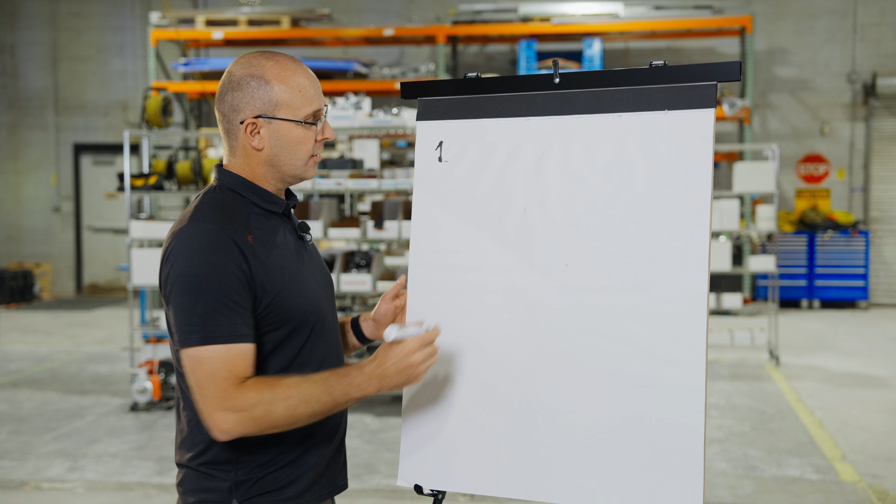You're obviously going to want to cover any safety topics because safety is our number 1 value and priority, but then we'll get into the other items that should be standard in every Trade Partner Weekly Tactical or trade partner meeting or sub-meeting or weekly work planning meeting. Whatever you call it, these are the typical things that you will want to cover. Number 1, you will want to make sure that you're doing look-ahead planning. So I like to do 6 weeks. So 1, 2, 3, 4, 5, 6. This can be the current week that you're working in.

I want to see, and especially by zone, but that is content that we'll cover in another video. I want to see exactly what is happening in each of these zones in the next 6 weeks. And I want to know for each of these activities if we are ready. So let me write this down.

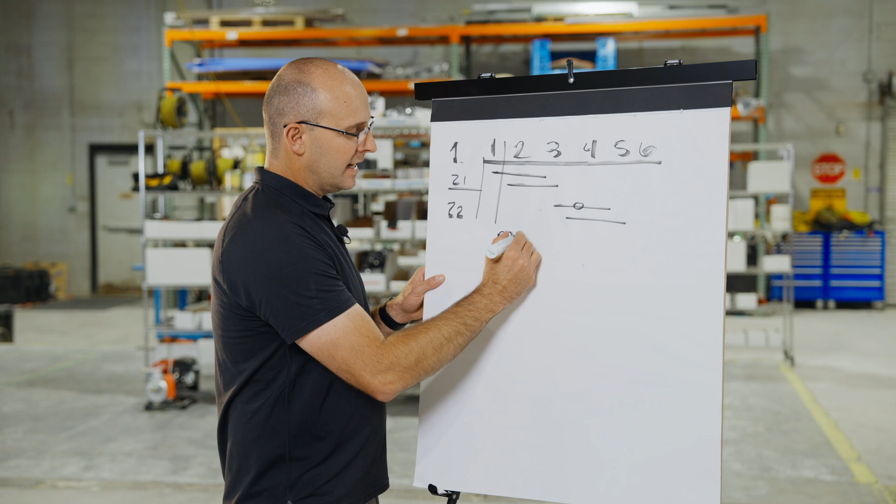Do we have the materials? Do we have the people? Do we have the permissions? Do we have the information? And I could just keep going on, but what I want you to do with your trade partners is to ask for every single activity for the next 6 weeks. Do they have the materials? Do they have the people, the permissions, the info, the layout, the equipment, the tools?

So I want you to do this, please, every meeting. Give them the look ahead filtered from the master schedule that originally came from the pull plan, a part of their plan. And I want you to give them at least 5 minutes to find a roadblock, meaning something that if we don't clear it out of the way, will stop work.

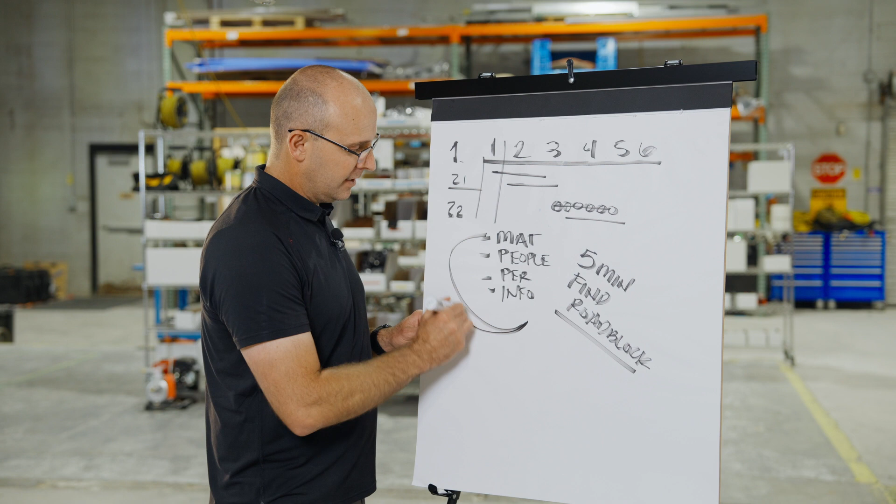A roadblock could be material that's not on time. It could be untrained labor or not enough labor. It could be a lack of permissions. It could be a missing RFI answer. Whatever it is, have every foreman in that 5 minutes go to their activities and find a possible problem.

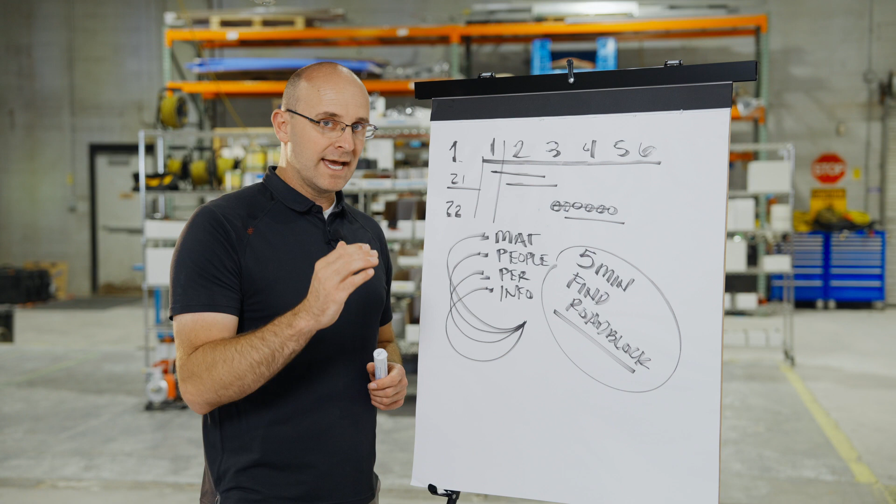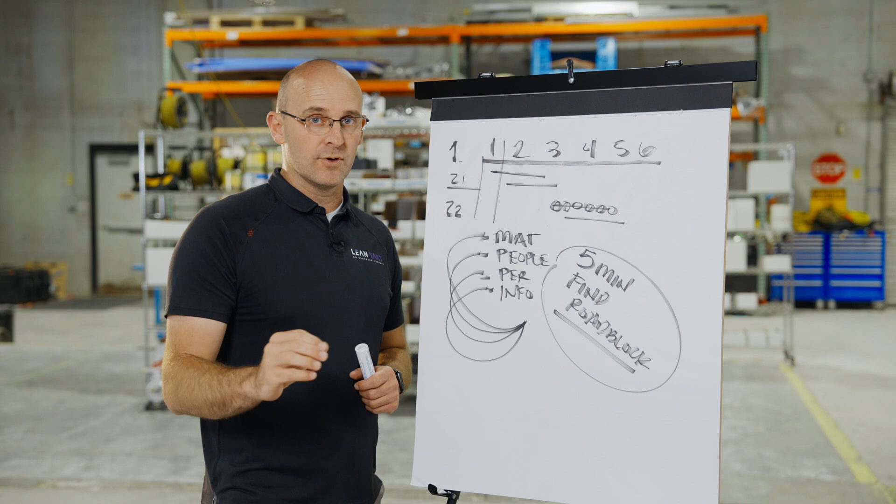When that happens, it immediately goes on the roadblock trackers or your visual maps for action, so that you can remove that roadblock and clear the path of work and create flow on the project. So a make ready look ahead schedule is specifically to make work ready and to find and remove roadblocks, and that will always be a standard part of this meeting. And I recommend you do that now.

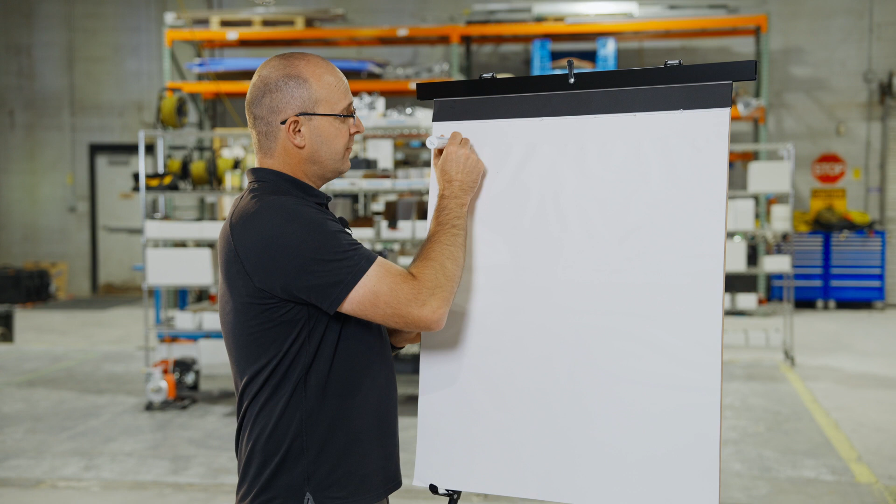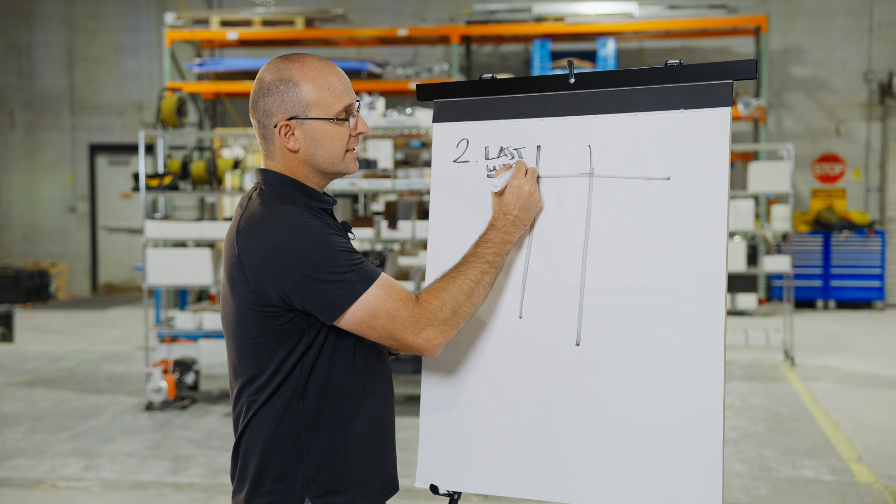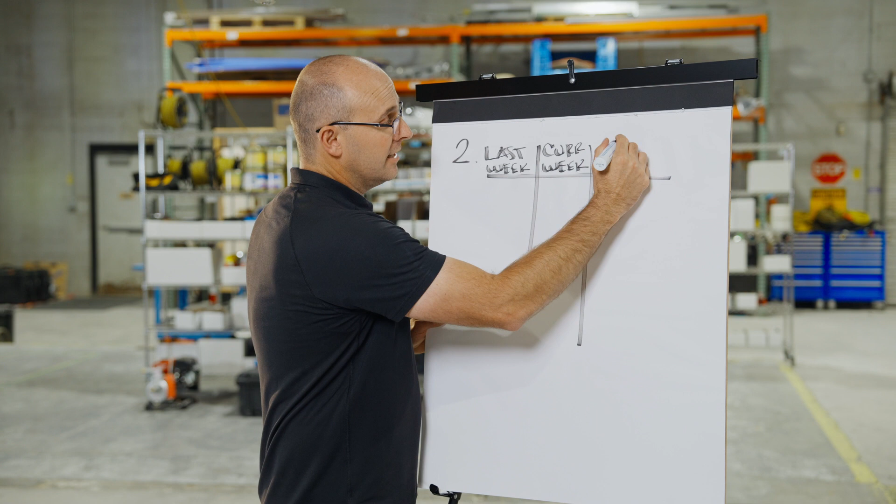Number 2, if you have done your make ready look ahead planning, you will want to look at 3 different periods of time. So you will want to look at your last week, or if you're in a takt system, hopefully, your last takt time, your current week, or like I said, if you're in takt, your current takt time, and then your next week or your next takt time.

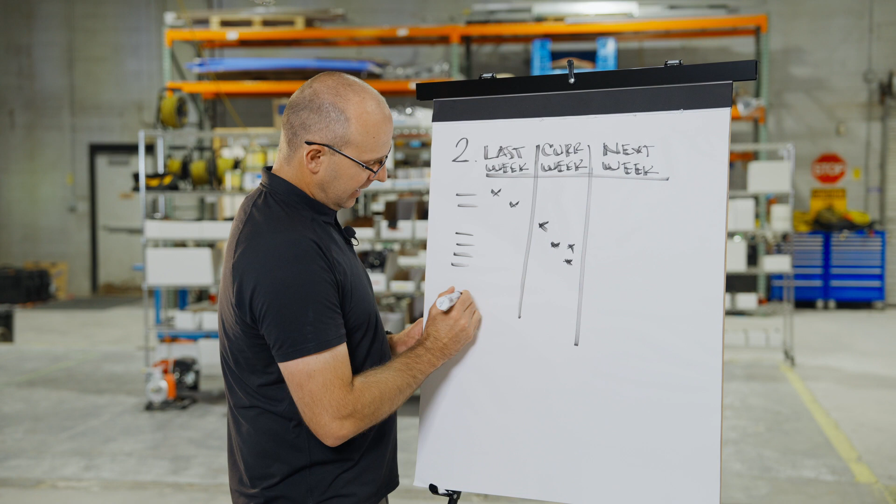So if you had over here activities that needed to be done, and this week you have activities that are continuing, and then you have next week, which we'll talk about in a minute, I want you to start out by saying, hey, did we accomplish this or did we not, right? So as you go through last week, you should have on your daily huddles checked, yep, that went well. If that did not, do not check it, right?

And then for the current week, yep, that went well, we're on track here, and I think we're on track here. The idea here is this, that if you did not check mark an activity, does that push the activities out? Does that impact? Is that a delay? Or do we have to come back and do it? So if you know what happened last week and this week, you can now identify what needs to be done next week.

Now, when you go ahead and bring in the activities for next week's plan as a part of your weekly work plan, you will be able to bring that in according to your takt plan if you are using a takt system. So those are brought in, and then you review this with your trade partners and say, hey, can you make this commitment? Or they will come up and present and say, I can make this commitment.

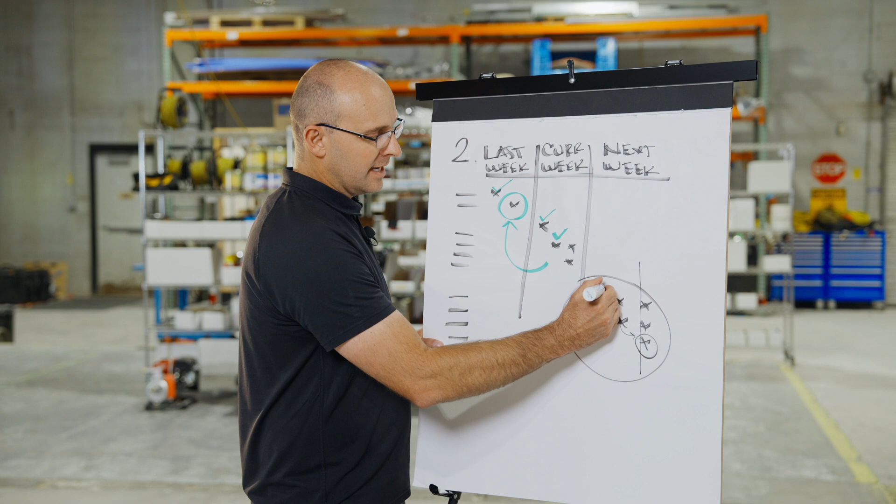Let's say from your standard flowable plan, you have to move that activity forward or back. Then you have a conversation. Well, does this work with the successor activity? Does it stack with other activities? Do we have enough space? And you start to have a collaborative discussion as a part of your communication, and then every trade will commit and say, yes, I commit to that, I can do that, I have the resources for that, I am ready for that.

And you create a weekly work plan that everyone can execute, and from which on a day-by-day basis, people can filter out their day plans, and they can know, hey, if I execute that task on time, I'm being a part of the team.

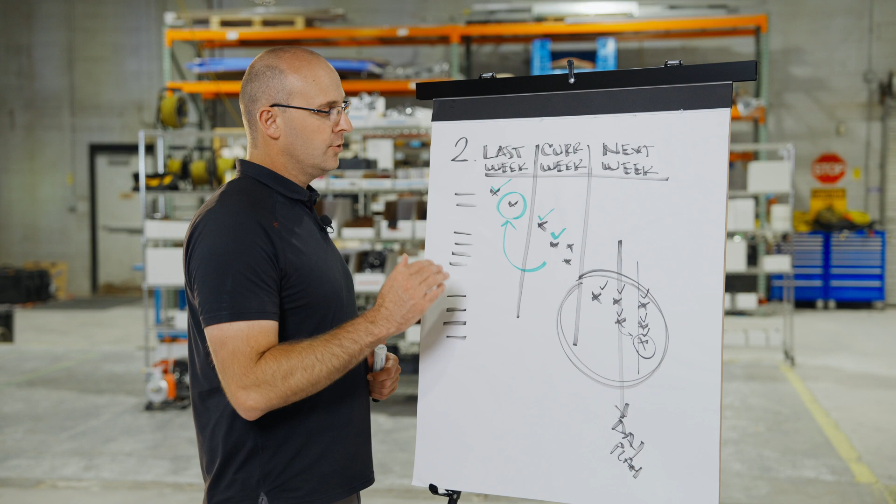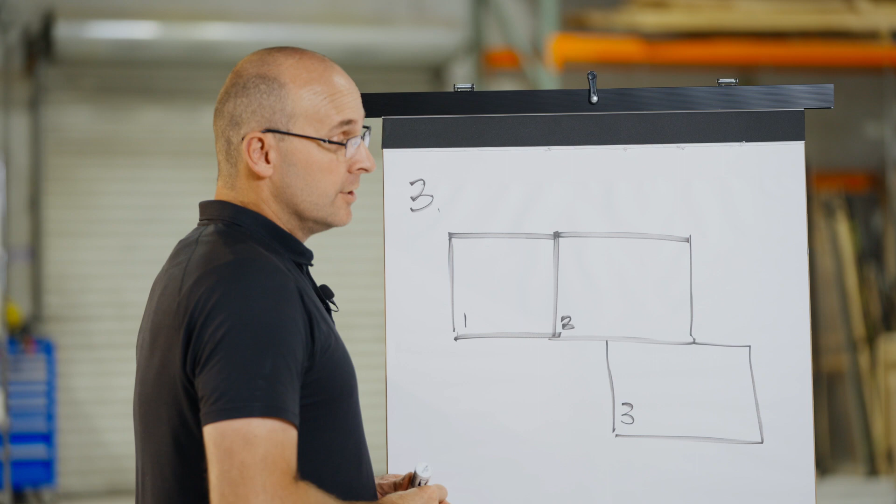So number 2, every time you have a strategic planning or procurement meeting, you will want to check in on your progress and create next week's weekly work plan. And number 3, in that meeting, I want you to focus on removing roadblocks. So when a roadblock gets written down in the very first place, I'm expecting you, and you can use red, but I'm going to showcase this in blue right now.

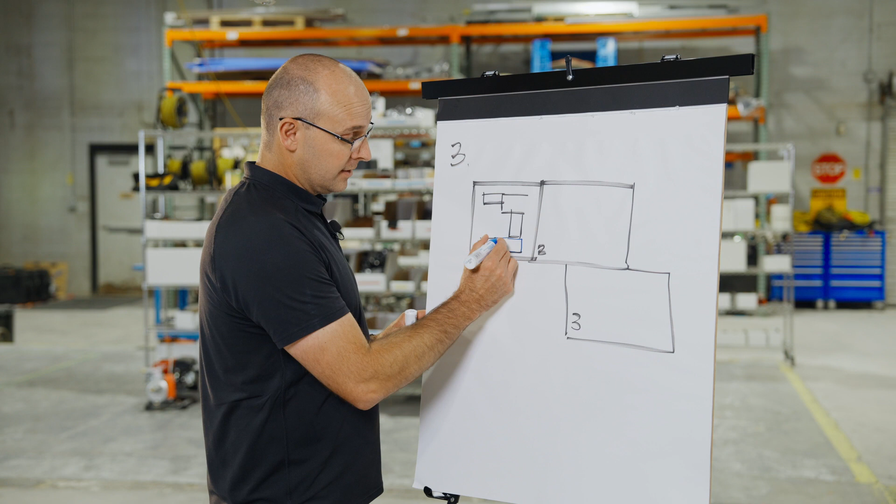You know, hey, for this room right here, let's say, for instance, that these zones over here represent a building. Maybe there are some office spaces in here, right? This is the work that you're doing. Maybe this is a corridor, right? If you have in your make ready look ahead planning a roadblock, an area that's not ready, you can highlight that room, make a little leader and say, hey, this is roadblock such and such, whatever number.

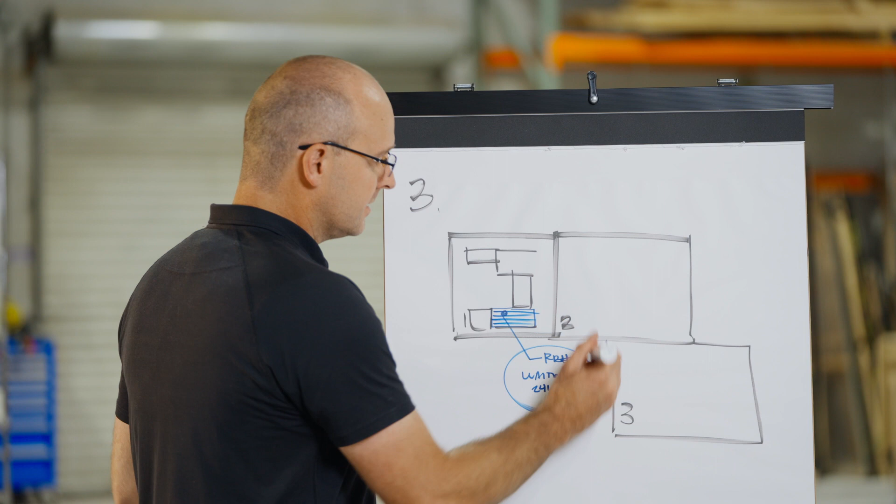Hey, you know, waiting on such and such, you know, RFI 241, right? This is a roadblock. You've written it down clearly. You've shown the trades. You can even hatch it to say, yeah, this is a problem. So every time a roadblock is written down, now the trades can visualize it.

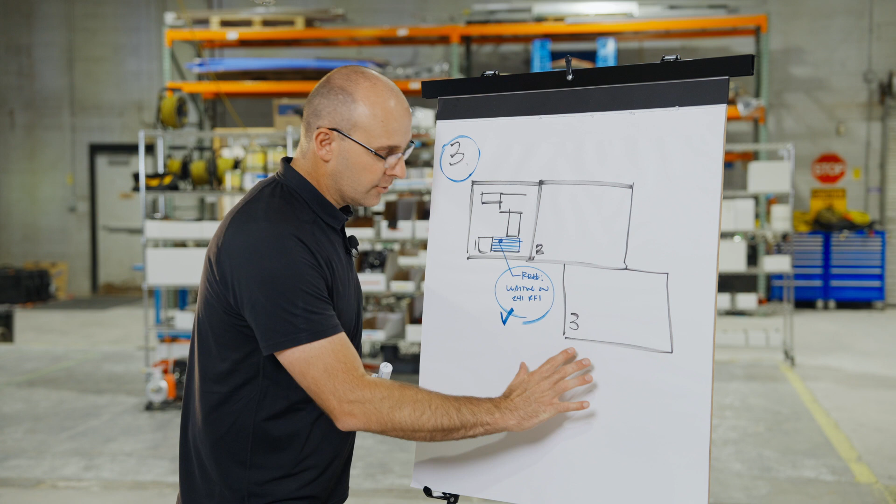And as a third part of your meeting, like I said, you can go one by one through all of your maps through the whole project and say, hey, what's the status? Who's working on it? Is it going to be removed in enough time to enable work? So those key 3 things, you will do look-ahead planning, you will create a weekly work plan, and you will look at your roadblocks throughout the entire project or functional area to make sure that you're clearing the path for work.

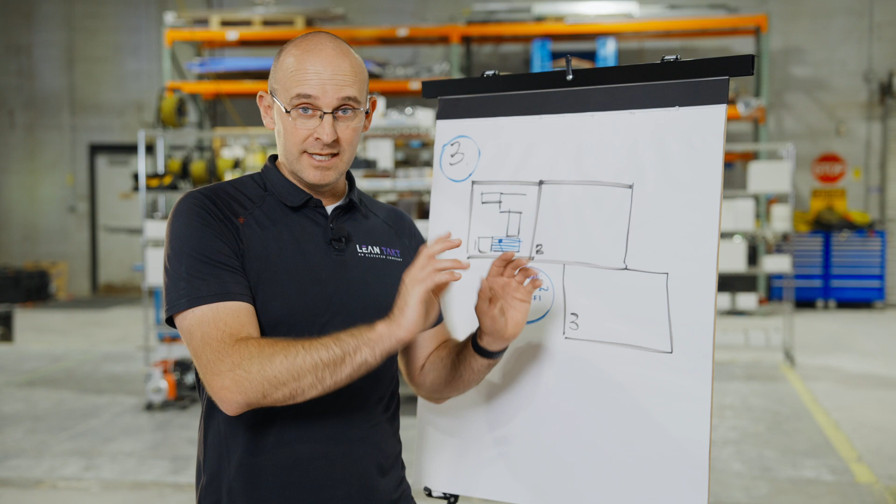I'll close this out strong by saying I want you to keep your roadblocks up to date. I want your zone maps up to date. I want any problems always up to date on those maps. Please update your logistics plan. You're going to be having discussions about logistics and any other key consideration as a part of your planning so that your trades can not only see the plan, but know the plan and execute the plan.

Highly recommend ending this meeting with a plus delta. What, as a part of this meeting, met the purpose? What could be improved? Remember, it'll take 3 weeks to 3 months to perfect this meeting, but you really want to make sure that people leave having prepared 6 weeks out, committed to a week out, meaning 2 Fridays from now if you're working within weeks, and that everyone can see and know the plan, not because it was shoved down their throat, but because they committed to it and now they're bought in and now they will execute it together as a team.

So I want to give you all some encouragement. This can be tough. It can be tough, first and foremost, to have the look-ahead plan in and of itself. It can be tough to take the 5 minutes to find roadblocks. It can be tough to ask a team of people for something and then to hear crickets. It can be tough to ask people to commit to their weekly work plan. But if you pair it with tact, and if you do it the right way, and if you stick with it and really love and care for the people in the meeting, and you really cherish their opinions, this meeting can turn into a fun and wonderful experience.

And what's really cool is when you start meeting the dates in the field, and then you can track your percent plan complete, where if out of 10 you completed 8, you've got an 80% score. Projects that hit above 80% historically are below budget and on time. If you're below 80%, historically you're above budget and not on time. So you can target an 80% score and really start winning as a team. So please leverage the Trade Partner Weekly Tactical.